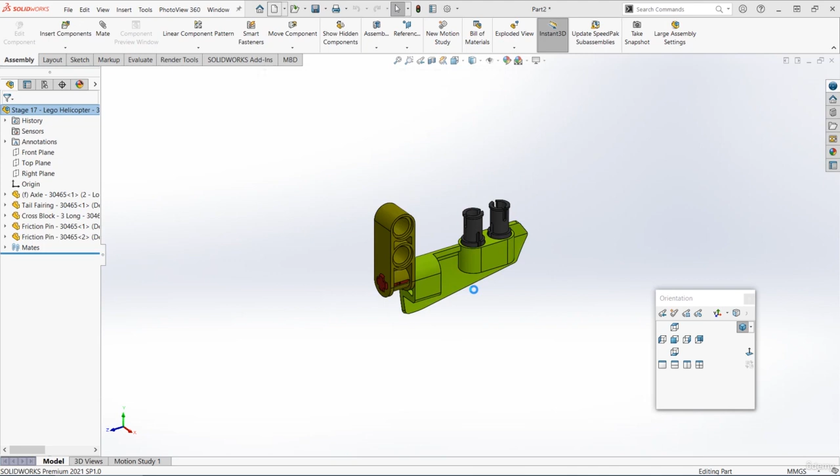The next part that we're going to make is the tail rotor. This looks like it could be a fairly complicated part, but it's actually alright once we get into it. Let's start a new part and start a sketch on the top plane, and first let's draw that inner rim. We can do this by drawing two concentric circles. The inner one is 4.8mm and the outer one is 7.4.

Then do a mid-plane extrude, and the width of this is 7.8mm. And let's just call that feature hub. Before we start adding the blades, we're going to cut away that top rim at the top of the hub. So start a sketch on this top face, then select that inner circular edge and offset that outwards 0.7mm. We can then do an extruded cut, so we'll go downwards 0.8mm. And let's call that feature rim cut.

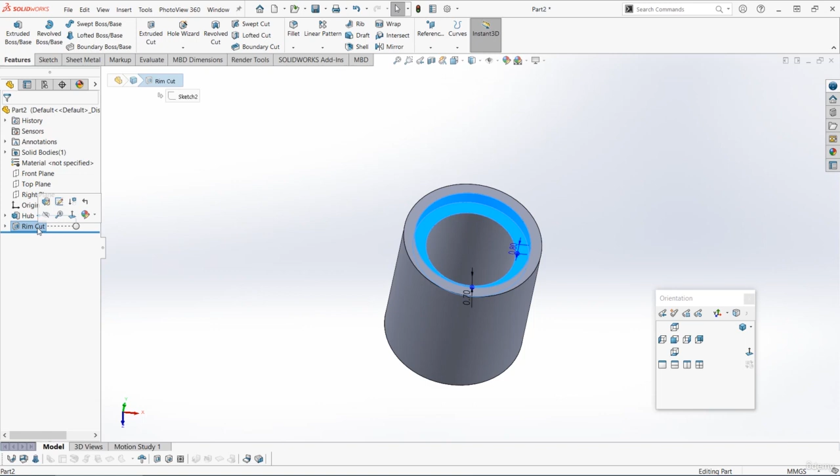Now we have this on both sides of the hub, so let's select that rim cut feature. Let's choose the top plane and then press mirror, and that preview looks good, so let's press OK. And we now have that feature on both sides of the hub. We can now actually start to draw the blade shape. So let's start another sketch on the top plane. Let's go to a normal to view, so we're looking directly down.

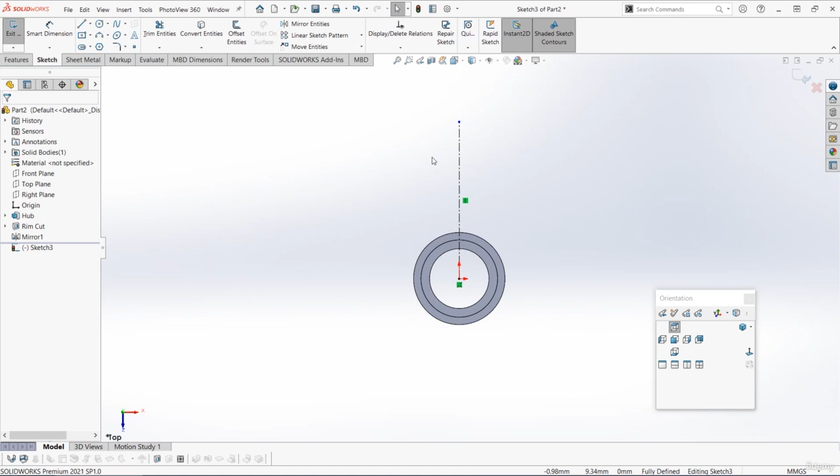Firstly, we'll add a center line because the blade is symmetrical. You can choose this from the drop down next to the line tool. Let's start from the origin and just go directly vertically up. Then let's get the line tool and start to add our actual blade shape. So I'm going to draw a profile something like this. Let's start at this point where the center line goes through the outer rim. Go directly out to the side horizontally, then go up and left, and then go sort of up and right like this, and then go back in horizontally to the middle to where the center line is.

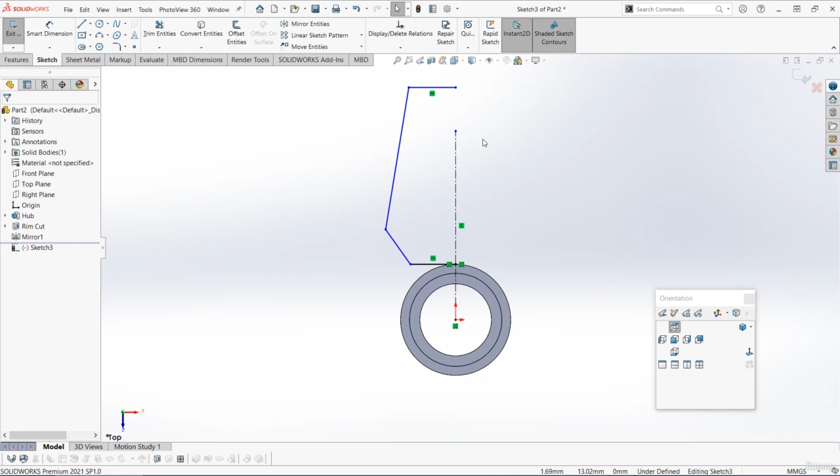We can now mirror this half of the sketch to the other side. So if you press Ctrl A, that will select everything in the sketch. Because we've just got that one center line, we can just go to the sketch tab and we can choose mirror entities, and everything will be automatically mirrored around that center line. So you should have this sort of enclosed profile that's kind of a coffin shape.

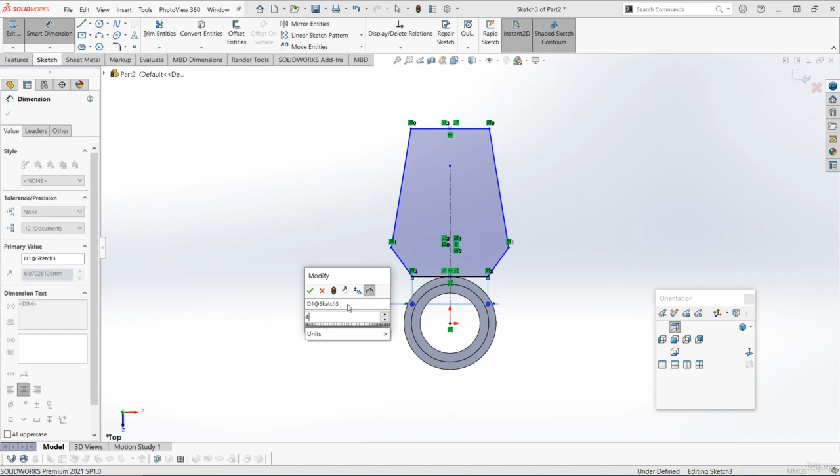We can now start to add some dimensions. So let's get the Smart Dimension tool. The width of this first line along the bottom is 4mm. This distance here is 2.85mm. Then this widest width here is 6.7mm. And this width on the end is 5.25mm. Then the total length here is 16.8, and that should fully define your sketch.

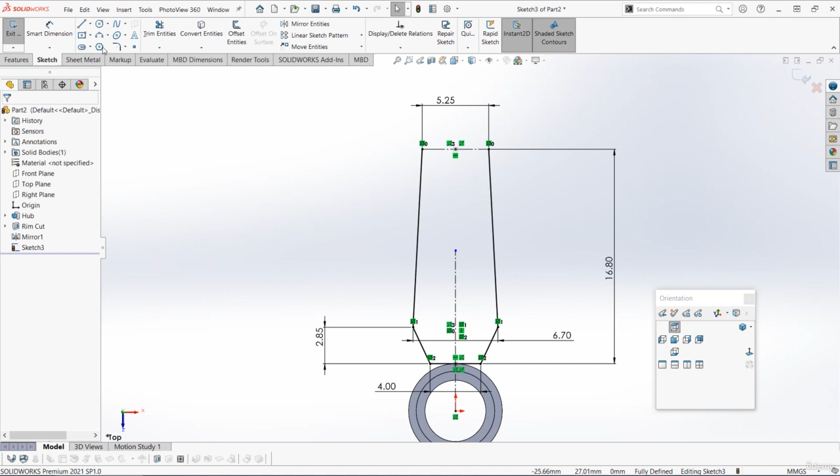Now actually, if we look at the blade, the end of it is curved and it's a little bit longer than this. So let's select this small line here and make it for construction. You can do this by selecting the line and clicking for construction on the left. Then let's get the arc tool and let's choose a 3-point arc, and let's just go from the left hand edge here over to the right hand edge and just drag your arc out so it's something like that. And let's set the height of this arc as 1mm. So you'll have to hold down Shift to dimension to the outside of that curve.

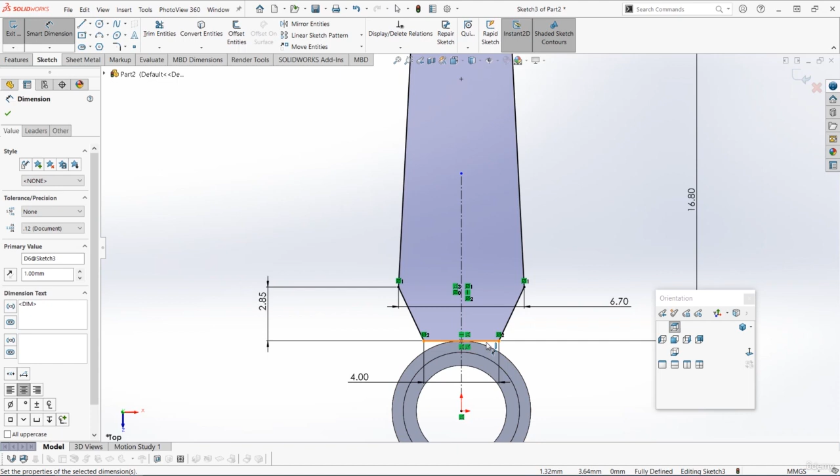We're now also just going to extend the bottom of the sketch a little bit, so we've got a root that goes into the hub. So let's click on this first line and make that for construction. Then let's go to the line tool and let's choose a midpoint line. You can get this by going to the drop down underneath the line tool. This is a line that goes out equally in 2 directions from a midpoint. So let's zoom in, let's start about here and go out directly to the side horizontally. And make sure you don't get any of the automatic relations, so don't click on any of these curved edges of the arc.

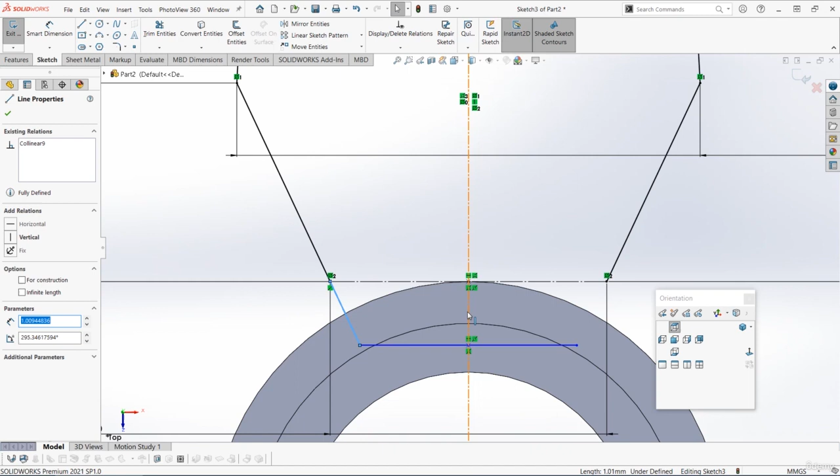Then let's just get a normal line, and we'll start at the bottom of this diagonal line, and we'll just follow the same angle down inwards like this until you hit that new line that we just drew. We can then drag in the outer point of that midpoint line so that it touches that new diagonal line. Then let's just select that new diagonal line and also select the center line and press mirror, and then we should have that on both sides. So we should have a closed profile again. And you should have something like this.

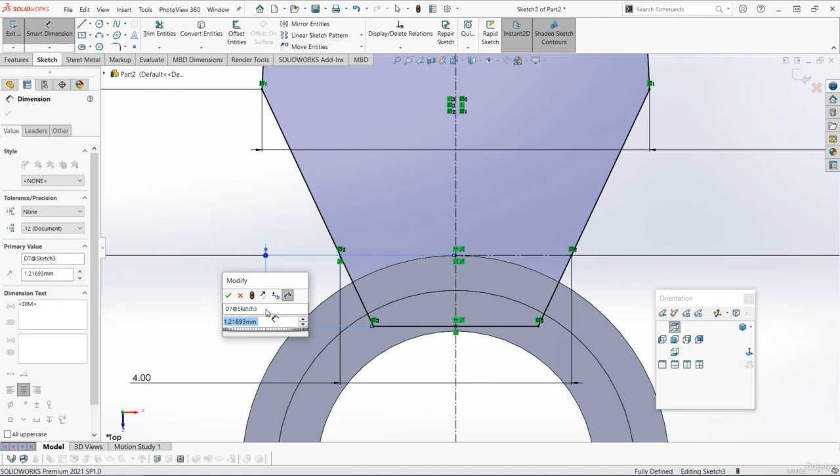If you find that your diagonal line is wonky, if it's not lined up with the diagonal line above it, then what you can do is select both of them and choose Make Collinear. Then let's just fully define the sketch by getting Smart Dimension and adding a dimension between here and setting that as 1mm. So we just wanted a bit of extra material there to attach to the hub. And you should have a sketch that looks like this.

We can now do a mid-plane extrude. So let's go to Features, Extruded Boss Base. Let's go 2.2 in size and set it as mid-plane. But before you press OK, we don't want this new blade to be merged with the hub yet because we want to add an angle to it. You can make this into a separate body by unchecking Merge Result here on the left.

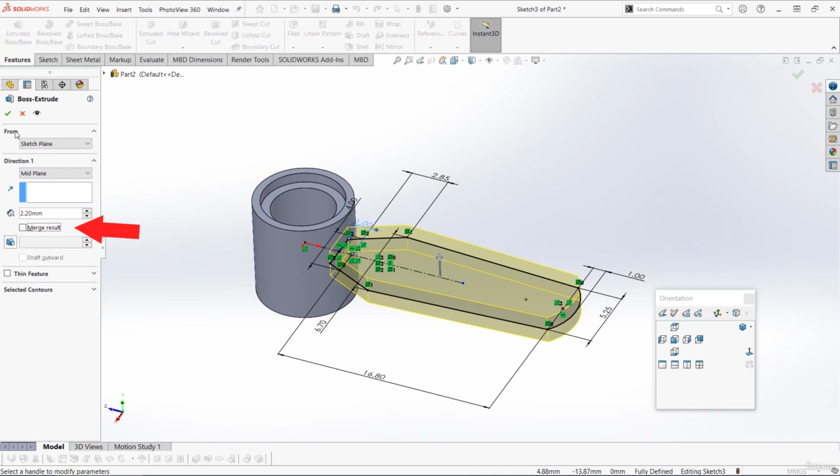Then if you press OK, you can see here in the Solid Bodies folder, we've now got a 2 after it. That indicates we've got 2 bodies in the model. And if we expand that folder, we can see we've got the hub and we've also got that new blade. So these bodies aren't connected to each other and we can make changes to them separately. At this stage, I'm also just going to rename that new feature as Blade.

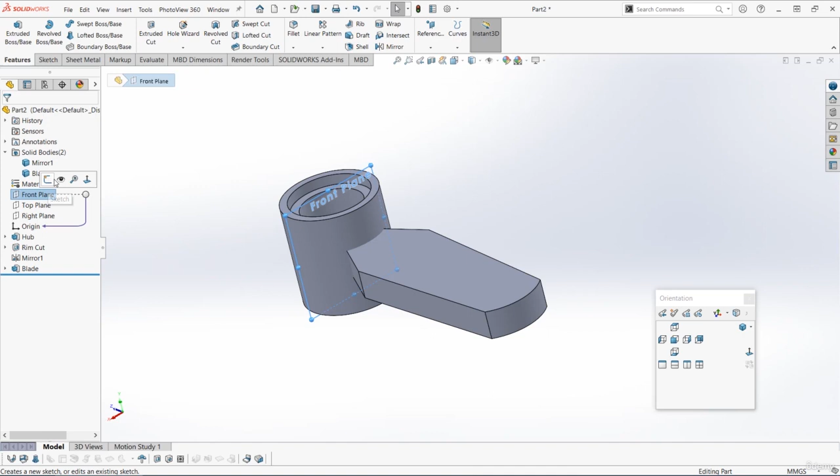Now, if we look from the end of the blade, it's actually got a curve to it on the top and the bottom. So to add this, let's start a sketch on the front plane. Let's go Normal To so that you can see the blade. You might need to press Normal To twice so that you flip your model around. Now let's get the line tool and we'll start at this top corner on the left and we'll go over to the top corner on the right.

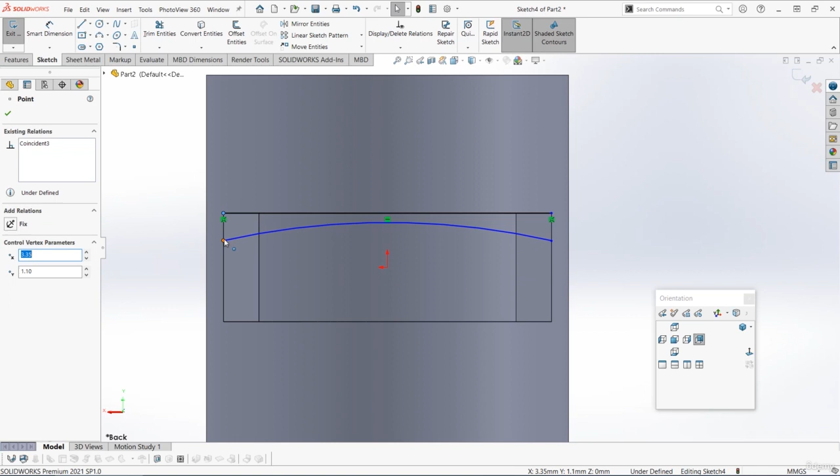Then let's get the arc tool and let's get a 3-point arc. We'll start also on the left hand edge and we'll go over to the right hand edge and draw something like this. Then these two ends, so the straight line and the arc, should be lined up vertically. So select them both and press make vertical. And then the same on the right hand, they should be vertical as well. And then select the arc and select the straight line and make those tangent. So that just means that the arc exactly touches that straight line.

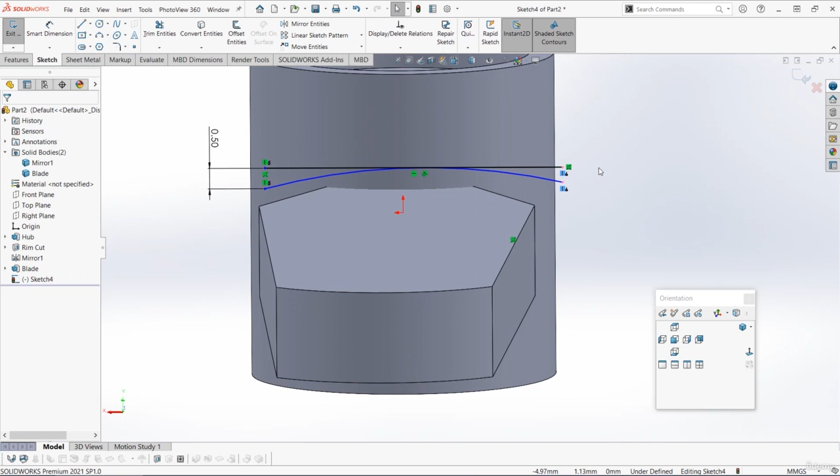And then the length here on the left should be 0.5. Now the ends here, they shouldn't be free to move in and out. They should be fixed to that widest part of the blade. So let's select one of those end points and let's also select this widest edge here and make those coincident. And then let's do the same on the other side. So let's select this point and also that widest outer edge and make those coincident.

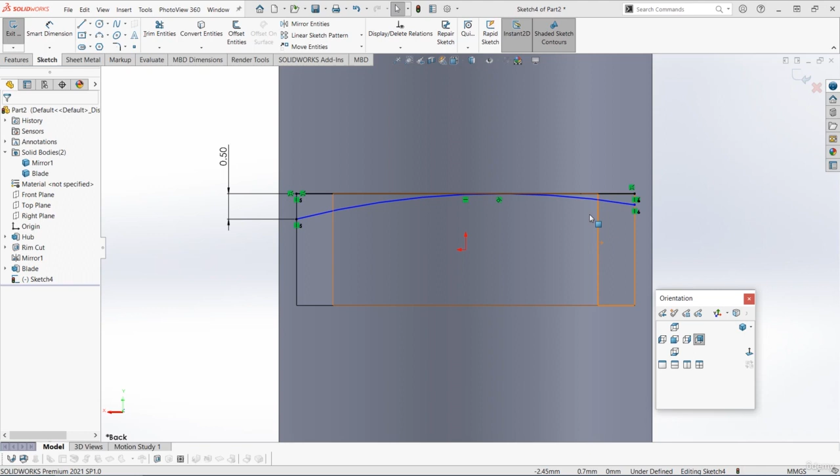If you're in a Normal To view, then you might just be able to drag those to the correct line and add that automatically, but sometimes it can be tricky to add that. And then finally, let's select these two end points of the arc and let's make those lined up horizontally. So that should fully define your sketch like that. We'll then get the line tool and we'll close the profile by adding a small line here and then the same small line on the other side.

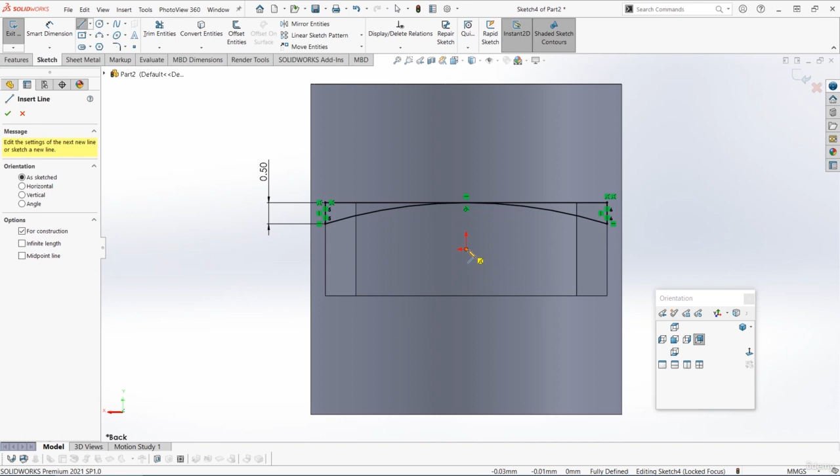We also want to mirror this profile over to the bottom edge. So let's get a center line. Let's draw a line that goes out horizontally from the origin. And then let's just press Ctrl A to select everything in the sketch. And then let's press mirror entities. And that should mirror that profile onto the bottom side of the blade.

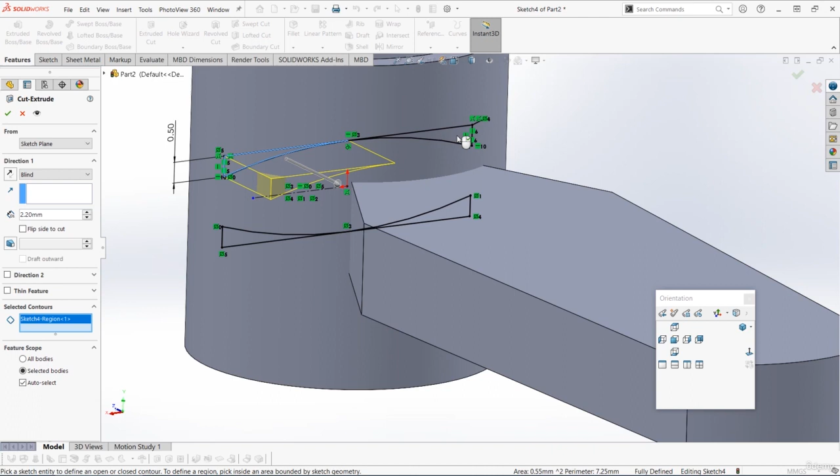We can now use this profile to cut away the curve of the blade. So let's go to Features, Extruded Cut. In the selected contours, let's choose those 4 areas of the profile. So there's 2 on the top and 2 on the bottom as well. For the end condition, we want to use through all going in this direction, but before you press OK, we actually only want to cut through the blade body, not the rim body.

So go down to the very bottom of the property manager here on the left, and where it says feature scope, make sure you have selected bodies chosen, and then uncheck that auto select box. If you don't see the feature scope there, it means that you've just got one single body in your model. So you need to go back to when we extruded that blade, and you need to edit the feature and uncheck that merge result box.

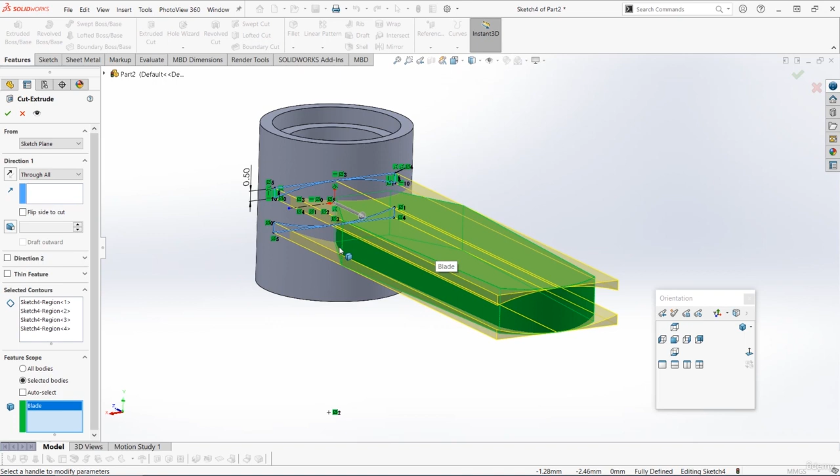But if you do see the feature scope, let's uncheck auto select, and then let's just choose the body that we want to cut. So it's just the blade body. So you can just click on that in the graphics area, and you should see the blade body goes into the box down there. So this means the cut that we're making is only applying to that blade body. Press OK, and we can now see that we've cut the curve on the top and the bottom of the blade.

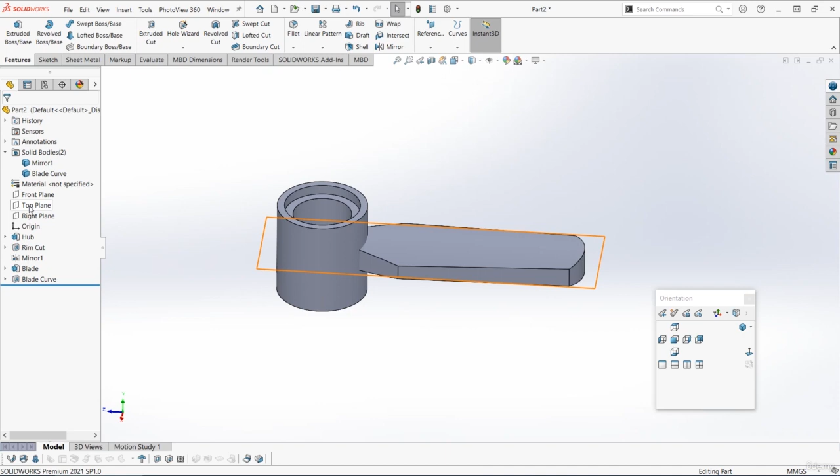Let's call that blade curve. Now we want to give a bit of an angle to this blade. So to do this, we can rotate it, but first we're going to add an axis, which will make it easier to rotate. We can add the axis using 2 planes. So first, let's select the planes that we want. So for me, it's the top plane and the right plane. So it's the 2 planes that go through the middle of the blade.

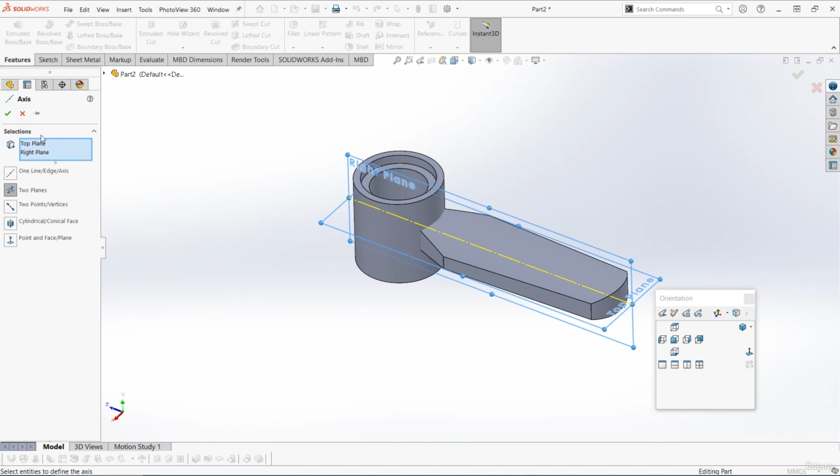So with both of those planes selected, go to the Features tab, click on the drop down underneath Reference Geometry, and choose Axis. You should get a yellow preview like this for where the axis is going to be added. If you don't see this, make sure you're on the 2 planes option here on the left, and just make sure you've got both of your planes selected there, the top plane and the right plane. And then if you press OK, that axis is added.

We can now use this axis to rotate the blade. And to do this, we're going to use the Move/Copy Bodies command. You can find this in Insert, Features, Move/Copy. You can also search for commands using this search box up here on the right.

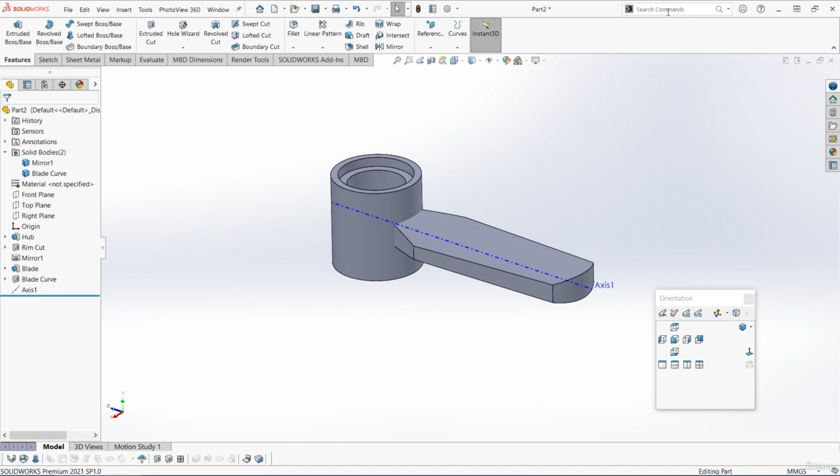To do this, first click on the drop down and make sure you're on the Commands option. And then just click in the box and start to type in the name of the command you want. So I'm going to start to type in move, so M-O-V-E, and we can see there the Move/Copy Bodies. And we can now open this tool just by clicking on it up here. We're now in the Move/Copy Body tool.

If your property manager looks different to this, if it looks like this, then just go down to the very bottom and click on this box that says Translate/Rotate. So it should look something like this. First, we want to select the body that we want to move. So let's click in this box at the top, and then let's select the blade body. We can then rotate this body around.

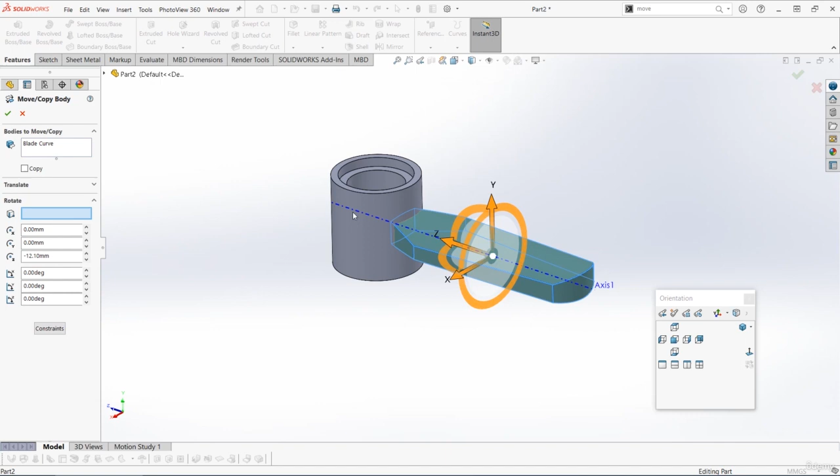So let's go down to the Rotate menu. Let's click in the first box. This is the rotation reference, which is the point where you'll rotate your body around. So let's click in that box, and let's choose that axis that we added. We now just need to set the angle of rotation around that axis.

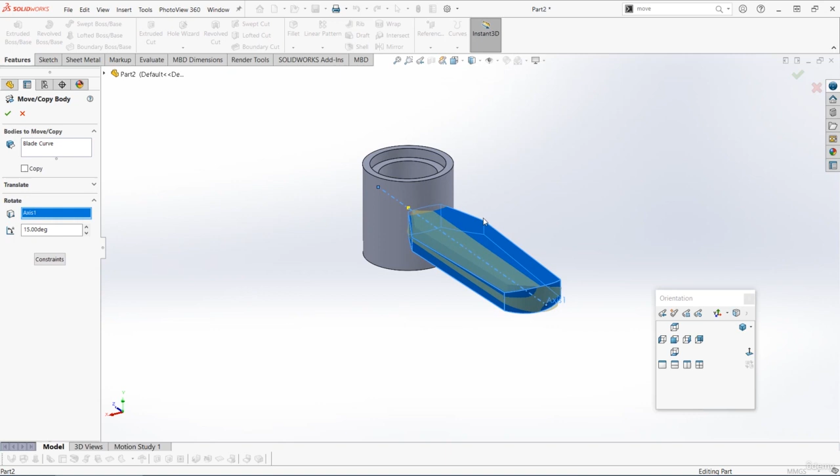Let's try 10 degrees, so the blade looks like that, and that's not quite enough, so let's up that to 15 degrees. And you should see a preview of the blade rotating slightly. Now make sure you don't have copy selected, that would add a second body, and then just press OK. Now the blade's at the correct angle, and we just need to pattern it around so there's 3 of them.

So let's go to the Features tab, click on the drop down underneath Linear Pattern, and choose Circular Pattern. Before you do anything else, let's go down and let's click in this bodies option because we want to pattern the entire blade body. And then select that blade body to pattern. We want to set 3 instances. It should be equal spacing 360 degrees.

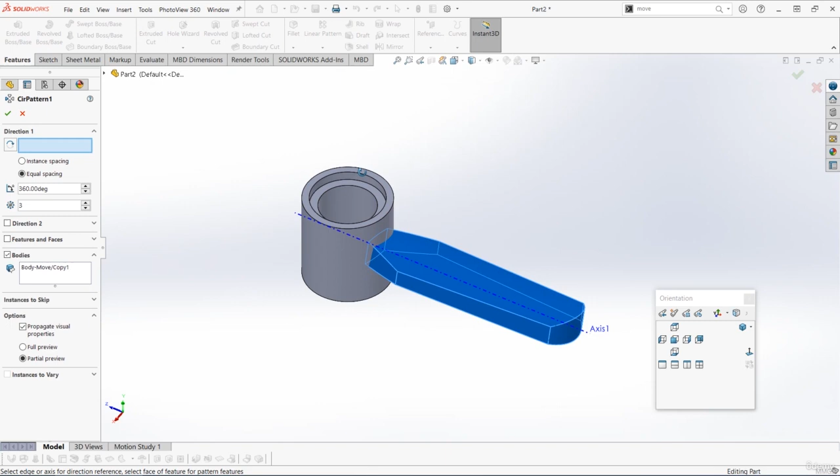And then we can choose the reference to pattern that body around. Click in this box at the top, and now we just need to choose a circular face in the hub. So I'm going to select this inside face, and when you do this, be careful that you don't select that axis by mistake. And you should see a preview like this. We're going to pattern that blade around 3 times. Let's press OK, and we've added those 3 new bodies there.

Now if we look in the solid bodies folder, we've got 4 bodies. So we've got the hub in the middle, and then we've got the 3 rotor blades which are all separate. We can now join these bodies into a single body using the combine feature. You can find this in Insert, Features, Combine, and also you can use that search box on the top right if you want. So if I type in COMB, there's the combine tool. I'm going to click on that to select it.

We're now in the combine tool. For the operation type, make sure you have add selected. This will just add all of the bodies together into a single body. And then for the bodies to combine, let's just choose all 4 of those bodies. So it's the internal rotor, and then it's the 3 blades. And then press OK, and now we've just got one single body again.

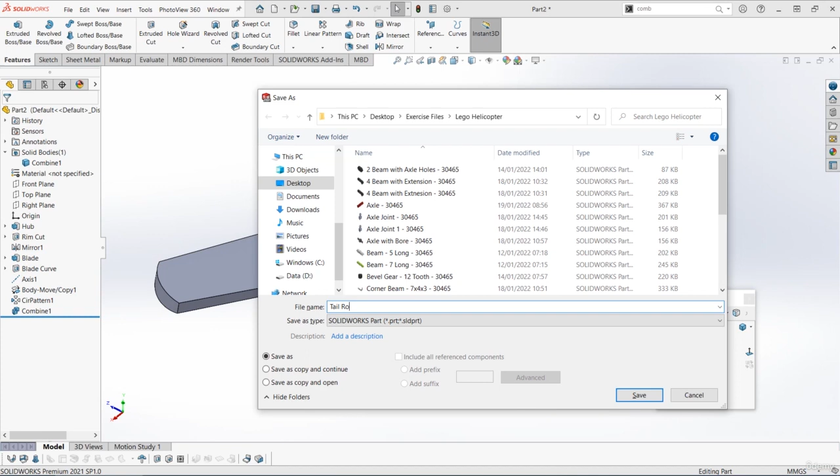You can then save this part, and I'm going to call mine tail rotor 30465. And let's change the color to that usual dark gray. In the next video, we'll be making the half bevel gear that actually spins the tail rotor around.